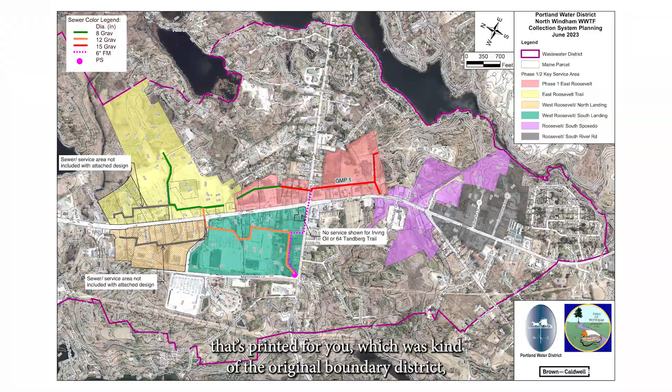What you have before you, when you look at it, you're going to see this magenta line that runs on that map that's printed for you, which was kind of the original boundary district, the boundary for the wastewater treatment area where we were looking to accomplish the sewer.

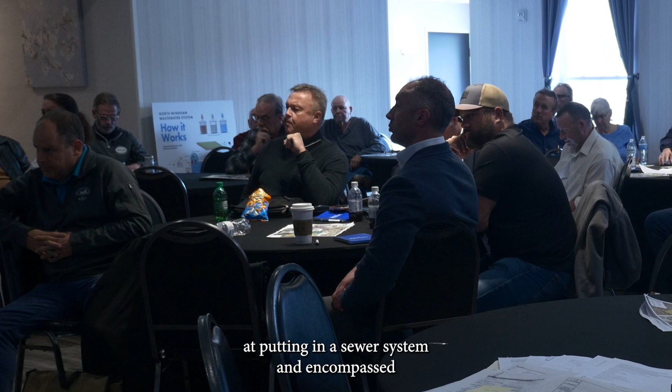I know in 2012 the community looked at putting in a sewer system and encompassed not only the business district but a lot of residential. It was minimum $60 million investment back then, probably would have been closer to 80 or 90 when it was done. That went to the voters and it got defeated, and that makes sense in retrospect when you're looking at it. But since that time, the town has still been focused on trying to find a solution, and it really happened around 2018 and 19.

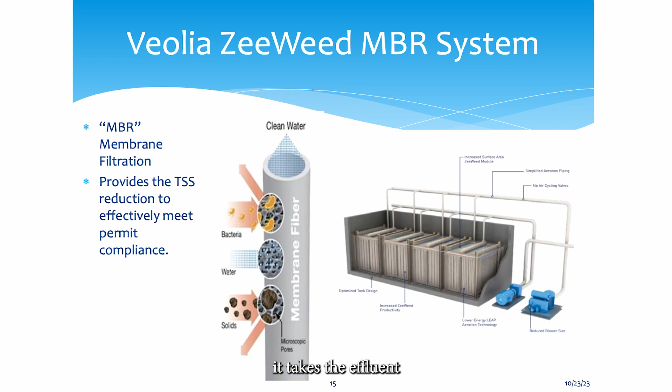Tom Bartell and Councilor Dave Nato started going to the New England Wastewater Conference in Boston, learned about some technology called MBR, which is membrane bioreactor. And what that technology does is it takes the effluent that goes to a wastewater system and it processes that effluent to the point that what comes out the other end is potable water.

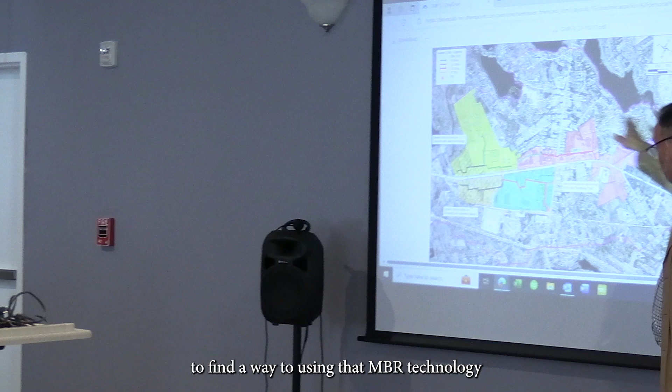So in 2020, the town entered into an agreement with Portland Water District, because by legislative actions in the 50s, they are our partners for wastewater and water here in Windham. And we outsourced to an engineering company to do an analysis of Windham, and particularly the business area, which is this magenta area that I just showed you, to find a way, using that MBR technology, to take that clean water and put it back in the ground.

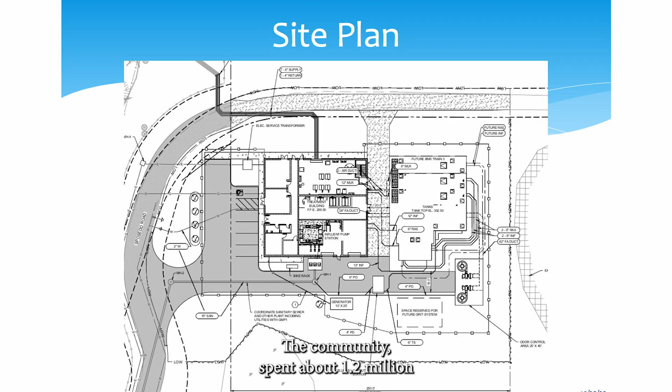The community spent about $1.2 million through our TIF funds to figure this solution out. And at the same time, they came back with a plan of what the total cost estimate might be to do this kind of project within this area. And they came back with roughly around a $40 million expense.

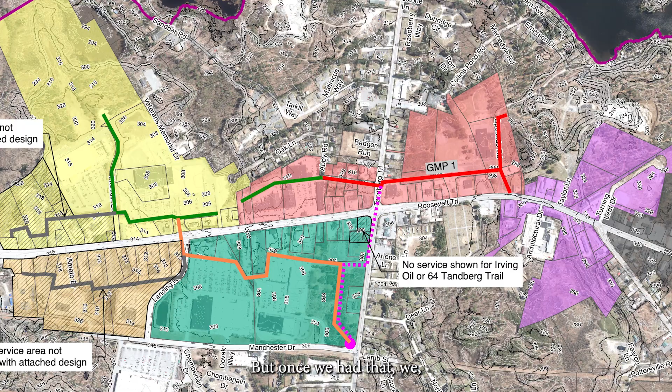Once we had that, we, with our partnership with Portland Water District, went out to bid. We entered into agreement through the Water District with an engineering company and with a construction company to actually take and look at ways to implement this new technology in this wastewater system here in Windham.

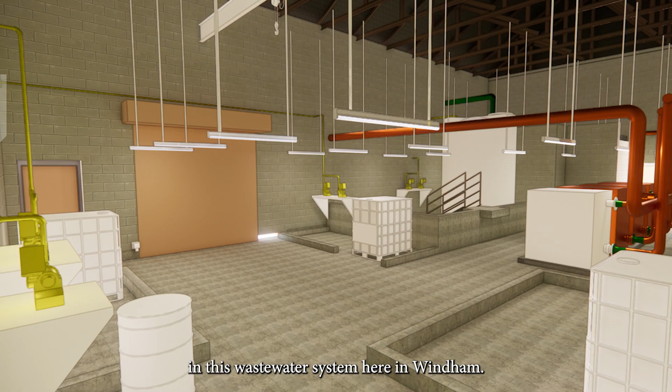So we're funding this through grants and the TIF. We're not using any residential tax base to pay for this. This is grants and TIFs, and that's important to understand. Not many communities are able to pull this off, but we've got the right number of TIFs, we've got the right price, we've got the right amount of grant money, so we're able to do that. So that's a huge blessing for Windham.

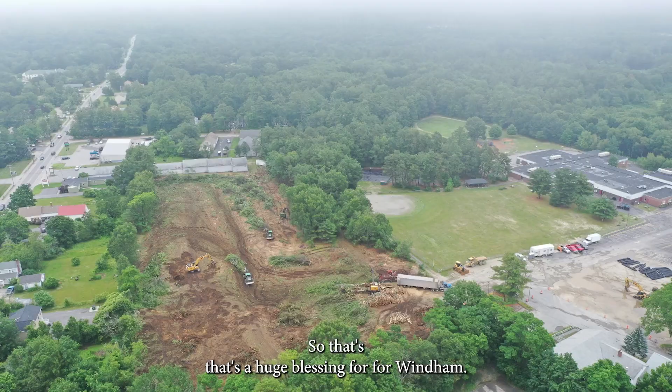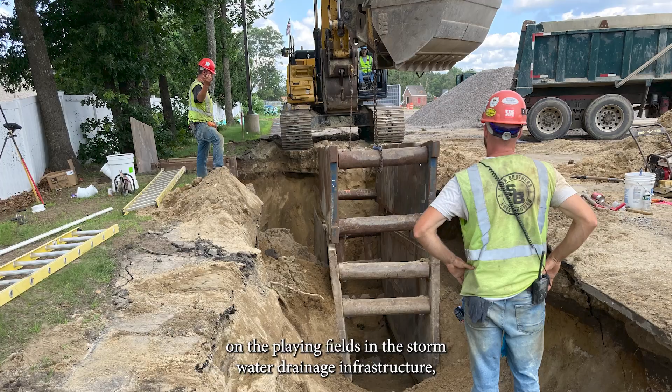The North Windham Sewer Project has been making steady progress since it began earlier this year. In July, Shaw Brothers completed clearing and grubbing of the project area and began construction on the playing fields and the stormwater drainage infrastructure, while also beginning construction of a new entrance to the Manchester School from Tandberg Trail.

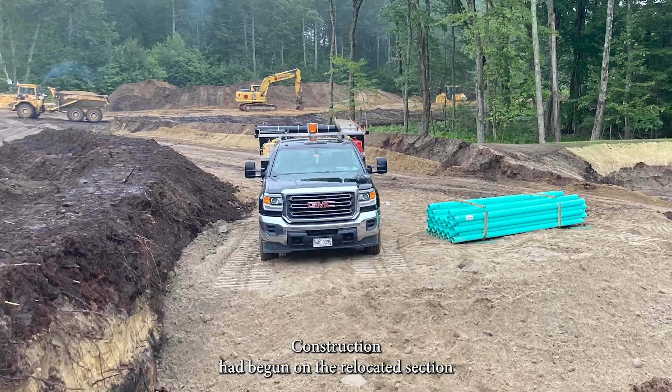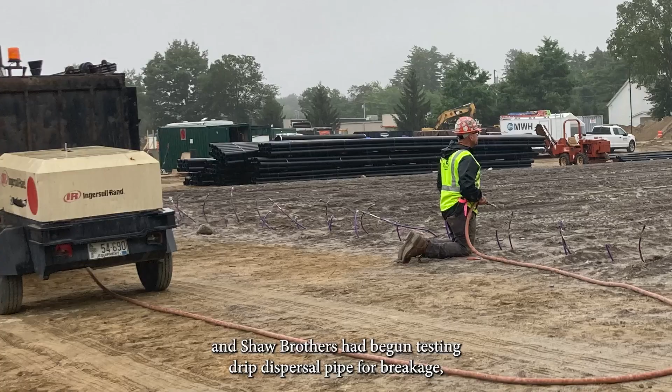The project really got rolling in August. Trenching for the gravity-fed sewer line was underway. Construction had begun on the relocated section of Sposedo Road. Work was continuing on the stormwater pond with installation of drainage media and underground piping. Clearing and leveling was underway at the future site of the new wastewater treatment plant, and Shaw Brothers had begun testing drip dispersal pipe for breakage, as well as paving the trenched areas of the Manchester School parking lot.

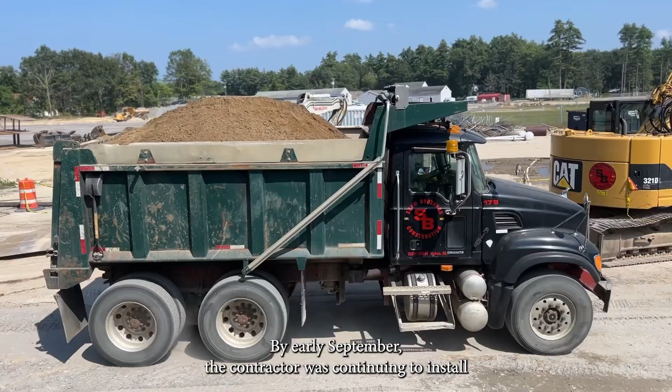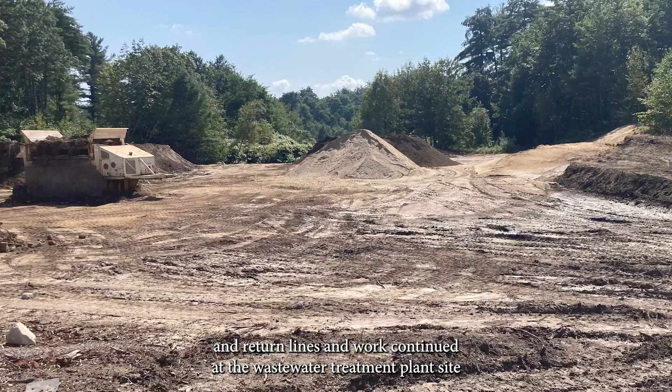By early September, the contractor was continuing to install the sewer lines and was working past the north end of the school parking lot. Wastewater dispersal tubing was being installed under the future playing fields, along with the supply and return lines, and work continued at the wastewater treatment plant site and on the stormwater pond.

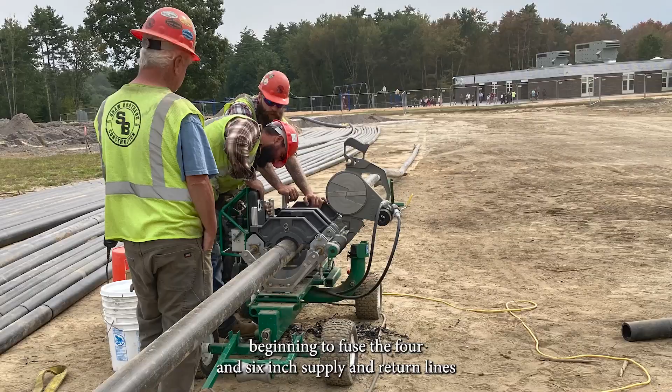In late September and early October, installation of the drip dispersal system continued, with the contractor beginning to fuse the 4- and 6-inch supply and return lines. Loam was beginning to be placed on the side slopes of the stormwater drainage pond, as well as filtering loam on its floor.

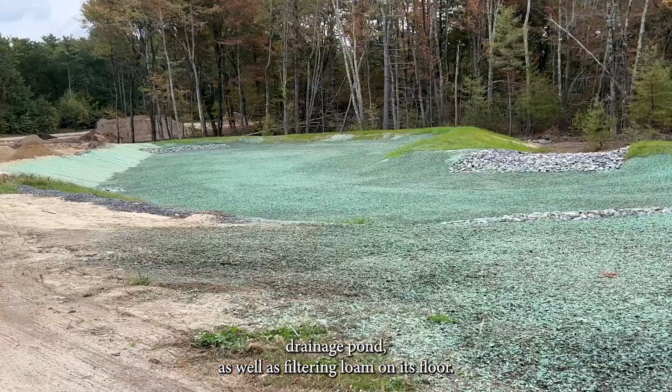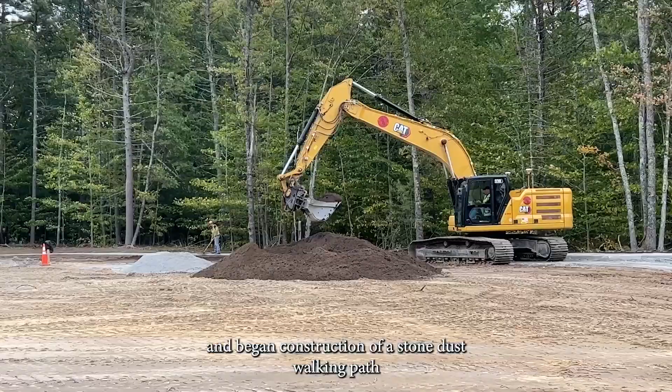By mid-October, Shaw Brothers had wrapped up construction on the drainage pond, was spreading loam on the future playing fields, installing supply and return lines back towards the future treatment plant, and began construction of a stone dust walking path on the northeast corner of the site. Though the pace will slow, construction will continue through the winter months, with work being done on the new wastewater treatment plant at the Manchester School location.